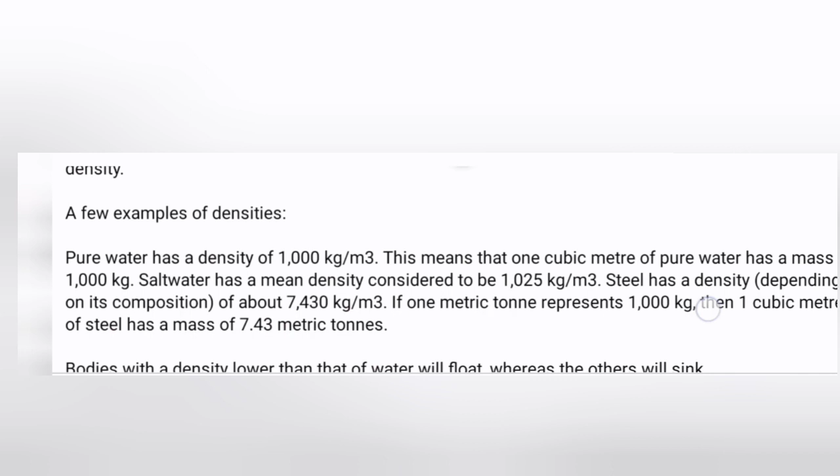A few examples of densities. Pure water has a density of 1000 kilograms per cubic meter. This means that 1 cubic meter of pure water has a mass of 1000 kg. Salt water has a mean density considered to be 1025 kg per cubic meter. Steel has a density, depending on its composition, of about 7,430 kg per cubic meter. If 1 metric ton represents 1000 kilograms, then 1 cubic meter of steel has a mass of 7.43 metric tons.

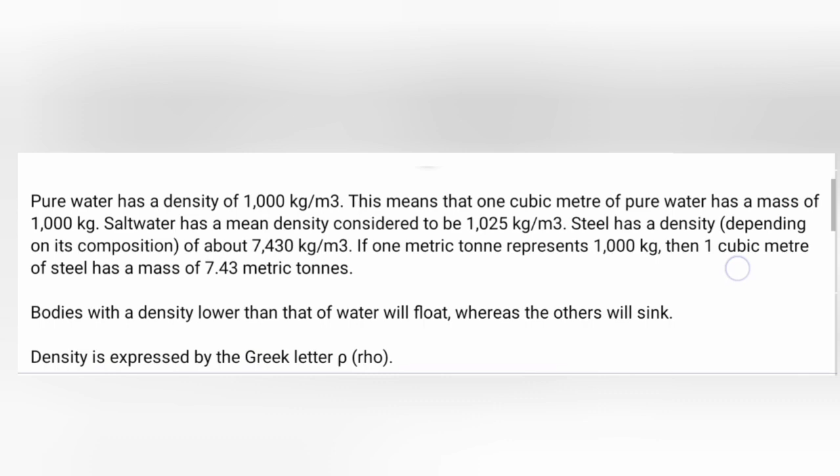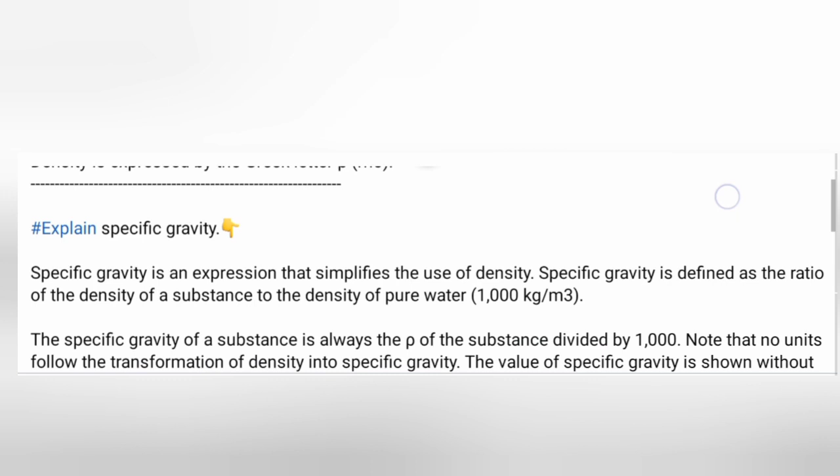Bodies with a density lower than that of water will float, whereas the others will sink. Density is expressed by the Greek letter rho. Explain specific gravity. Specific gravity is an expression that simplifies the use of density. Specific gravity is defined as the ratio of the density of a substance to the density of pure water, 1000 kilograms per cubic meter. The specific gravity of a substance is always the rho of the substance divided by 1000. Note that no units follow the transformation of density into specific gravity. The value of specific gravity is shown without units.

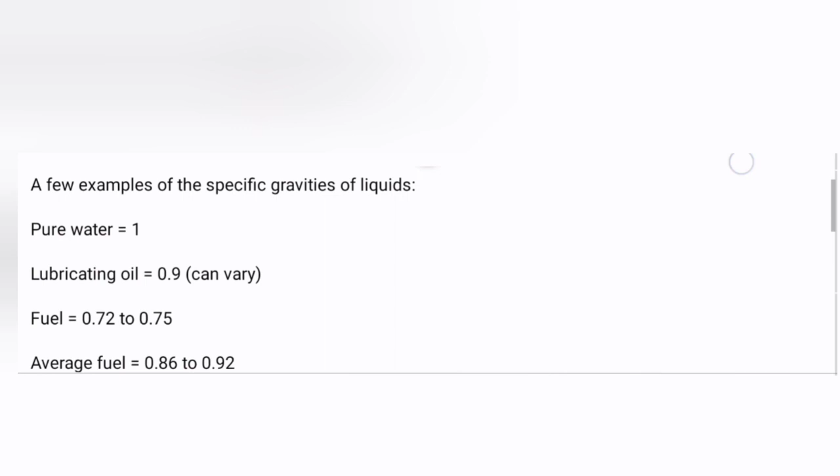A few examples of the specific gravities of liquids. Pure water equals 1, lubricating oil equals 0.9, can vary, fuel equals 0.72 to 0.75, average fuel equals 0.86 to 0.92, heavy fuel equals 0.92 to 0.95, fuel oil equals 0.95 to 0.99.

Explain the difference between mass and weight. The mass of a body or a substance is a value that represents the quantity of matter of the body or substance. The mass will not change if the body is placed on the moon, the top of a mountain, or at sea level. The force exerted by this mass when it is subject to the Earth's gravitational attraction is the weight of the body or substance. Since gravitational attraction is variable, it is lower at higher altitudes than at sea level, the moon's gravitational attraction is weaker than the Earth's, etc. The weight of a body or substance will vary according to its location, but its mass will always remain the same.

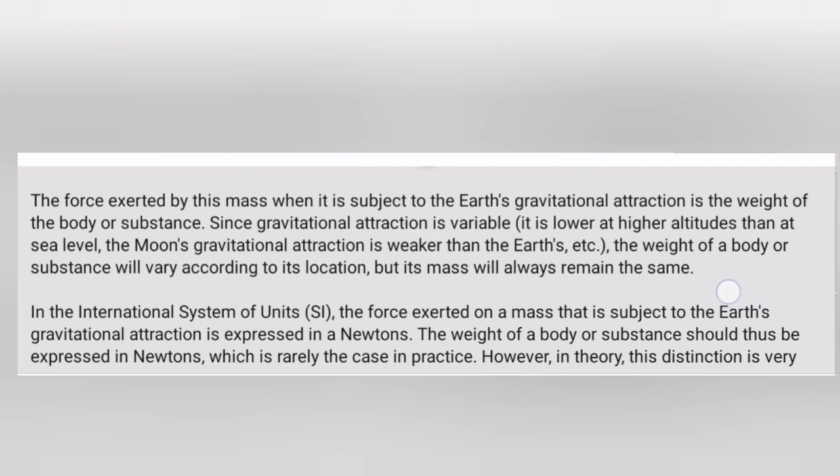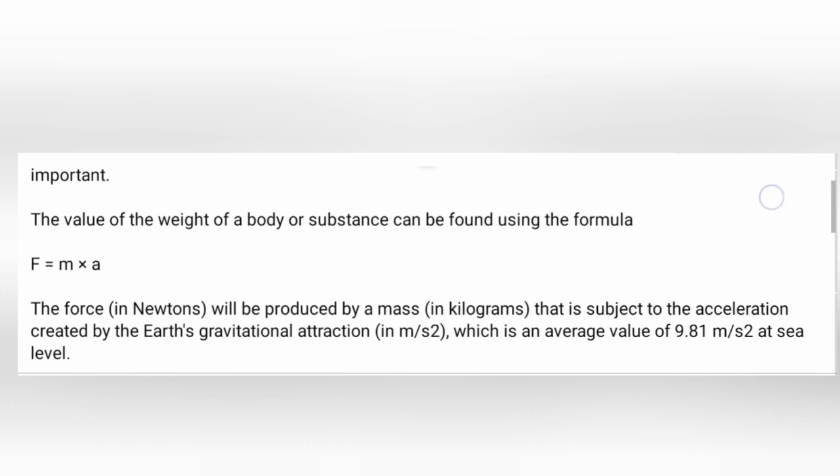In the International System of Units, SI, the force exerted on a mass that is subject to the Earth's gravitational attraction is expressed in newtons. The weight of a body or substance should thus be expressed in newtons, which is rarely the case in practice. However, in theory, this distinction is very important. The value of the weight of a body or substance can be found using the formula F equals m times a. The value of the force, in newtons, will be produced by a mass, in kilograms, that is subject to the acceleration created by the Earth's gravitational attraction, in meter per square second, which is an average value of 9.81 meters per square second at sea level.

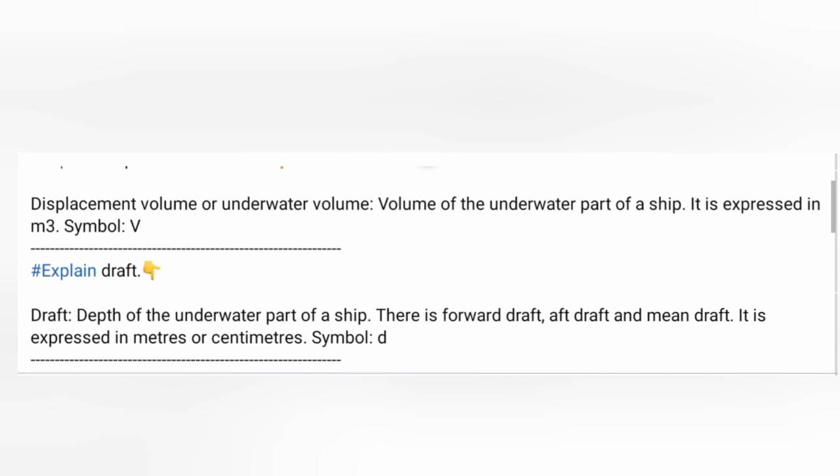Explain displacement. Displacement, mass of the volume of water that a ship displaces. This mass is equal to the ship's mass. Displacement is expressed in tons. Symbol, delta. Explain displacement volume. Displacement volume or underwater volume, volume of the underwater part of a ship. It is expressed in m3. Symbol, V. Explain draft. Draft, depth of the underwater part of a ship. There is forward draft, aft draft and mean draft. It is expressed in meters or centimeters.

Symbol, d. Explain deadweight. Deadweight, the mass that a ship can carry. This mass represents the cargo, fuel, water and everything required for proper operation of the ship. Specifically, cargo deadweight represents the mass of the cargo that can be loaded. Deadweight is the total mass of goods that a ship can carry at its maximum permissible draft, including fuel, fresh water, gear, provisions, etc.

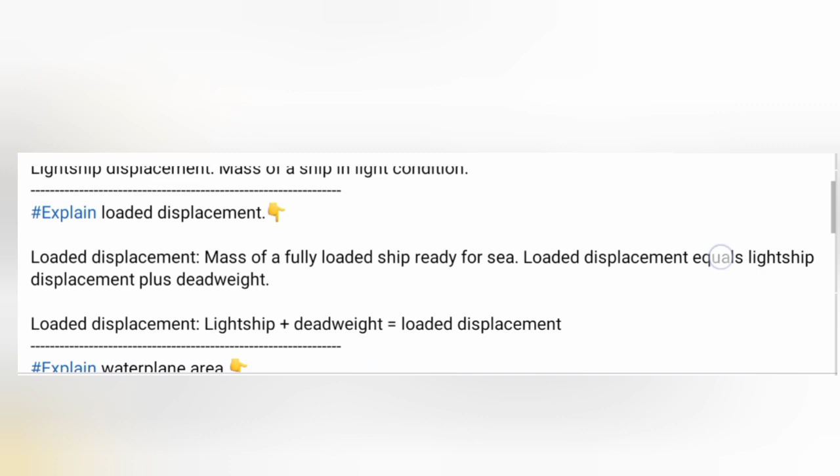Explain loaded displacement. Loaded displacement, mass of a fully loaded ship ready for sea. Loaded displacement equals lightship displacement plus deadweight. Lightship plus deadweight equals loaded displacement. Explain waterplane area. Waterplane area, area at the intersection of the surface of the water and the waterline of a ship. It can vary according to the ship's draft.

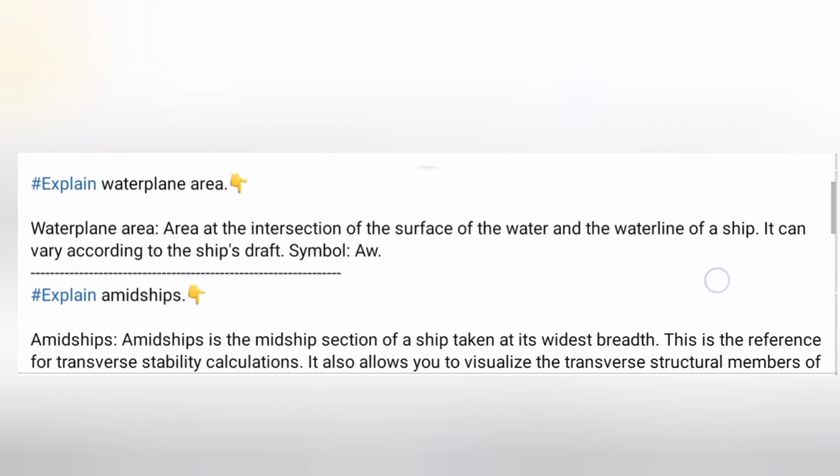Symbol, AW. Explain amidships. Amidships is the midship section of a ship taken at its widest breadth. This is the reference for transverse stability calculations. It also allows you to visualize the transverse structural members of the hull. Explain lightship weight. Lightship weight, real weight of an empty ship.

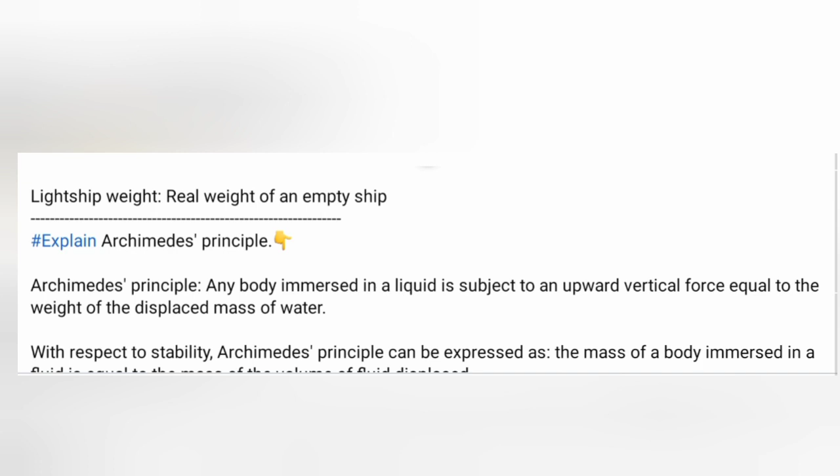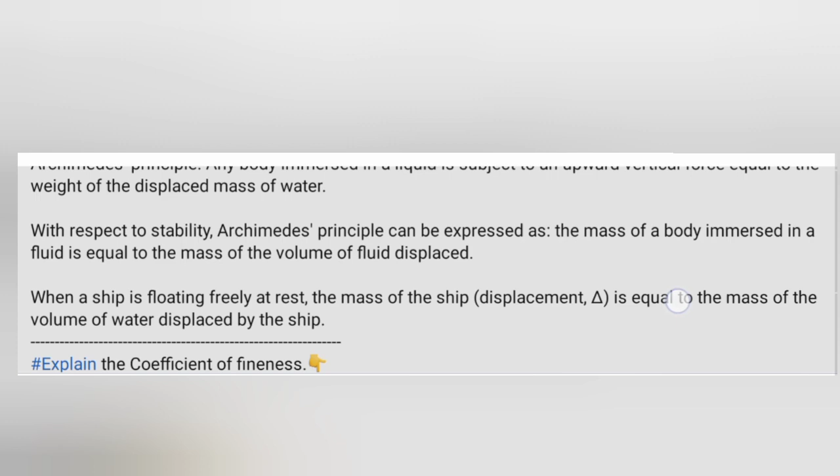Explain Archimedes' principle. Archimedes' principle, any body immersed in a liquid is subject to an upward vertical force equal to the weight of the displaced mass of water. With respect to stability, Archimedes' principle can be expressed as, the mass of a body immersed in a fluid is equal to the mass of the volume of fluid displaced.

When a ship is floating freely at rest, the mass of the ship, displacement, delta, is equal to the mass of the volume of water displaced by the ship.

Explain the coefficient of fineness. Coefficient of fineness of the waterplane area, CW. This coefficient, variable according to the ship's draft, can be expressed as the ratio of the waterplane area to the area of a rectangle having the same length and breadth.

Explain the block coefficient. Block coefficient, CB. Coefficient, variable according to the ship's draft, that represents the ratio of the underwater volume of a ship to a rectangular block having the same length, breadth and depth.

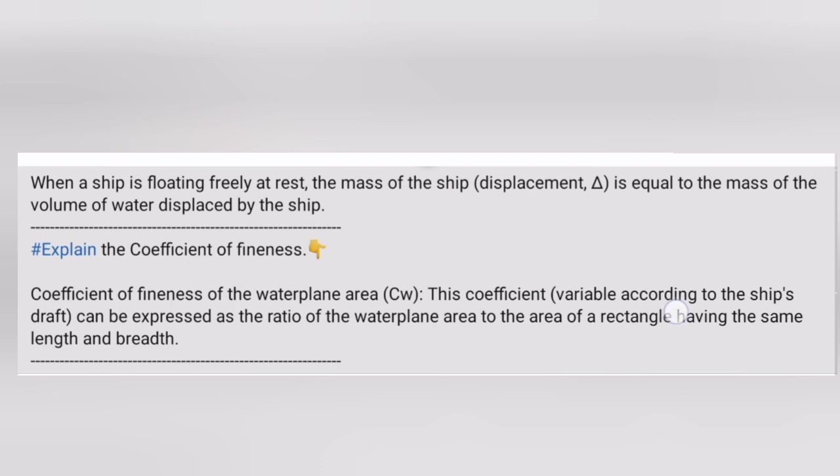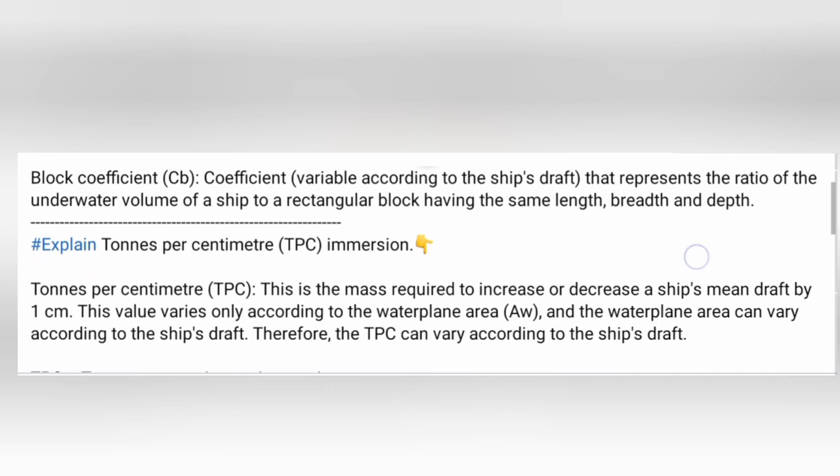Explain tons per centimeter, TPC, immersion. Tons per centimeter, TPC. This is the mass required to increase or decrease a ship's mean draft by 1 centimeter. This value varies only according to the waterplane area, AW, and the waterplane area can vary according to the ship's draft. Therefore, the TPC can vary according to the ship's draft. TPC equals tons per centimeter immersion. TPI equals tons per inch immersion.

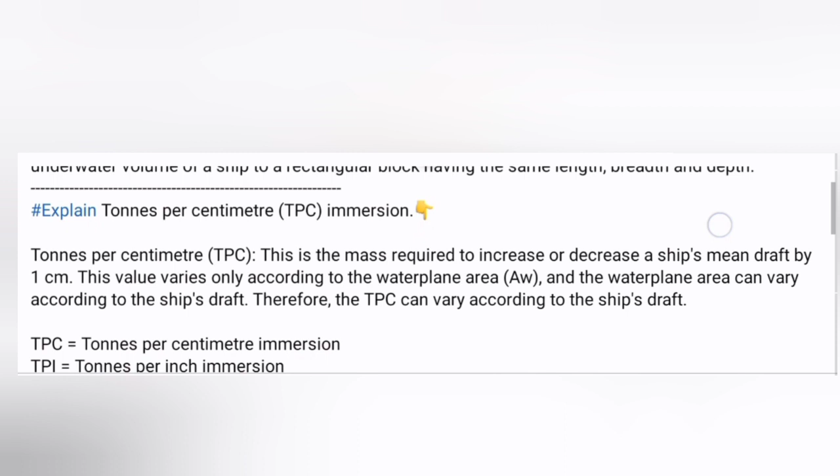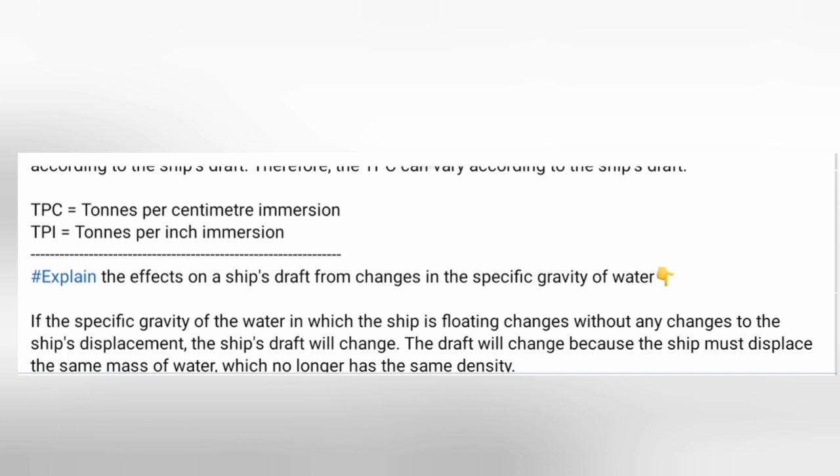Explain the effects on a ship's draft from changes in the specific gravity of water if the specific gravity of the water in which the ship is floating changes without any changes to the ship's displacement. The ship's draft will change. The draft will change because the ship must displace the same mass of water, which no longer has the same density. Delta equals V times rho. If the displacement, delta, remains constant and the density, rho, changes, the underwater volume must change. Therefore, the ship's draft will change automatically.

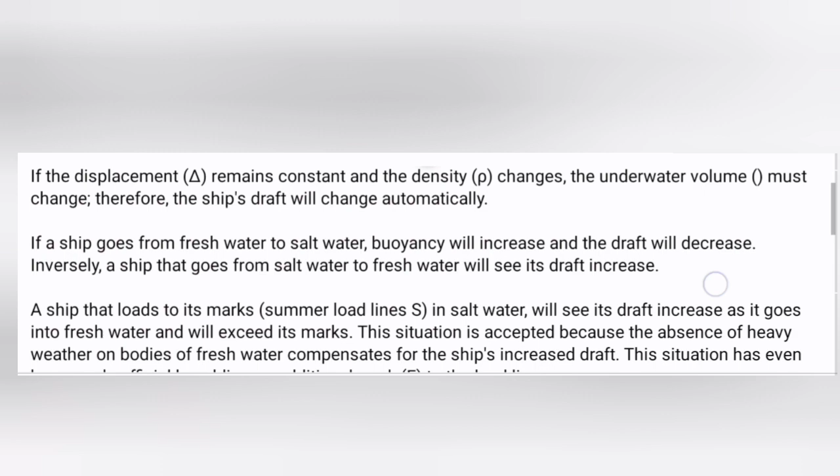If a ship goes from fresh water to salt water, buoyancy will increase and the draft will decrease. Inversely, a ship that goes from salt water to fresh water will see its draft increase. A ship that loads to its marks, summer load lines S, in salt water, will see its draft increase as it goes into fresh water and will exceed its marks. This situation is accepted because the absence of heavy weather on bodies of fresh water compensates for the ship's increased draft. This situation has even been made official by adding an additional mark, F, to the load lines.

Explain fresh water allowance, FWA. Fresh water allowance, FWA. Inversely, a ship that loads in fresh water can load up to its F line, so that when it is in salt water it will float at its regular marks. This allowed increase in draft is called the fresh water allowance. The FWA is therefore the change in draft when a ship goes from salt water to fresh water.

Explain transverse statical stability. Transverse statical stability is the ship's stability at small angles of inclination. The rules of statical stability are considered to apply to angles of inclination less than 15 degrees. To be able to calculate stability, first the fixed and mobile points on a ship's cross-section must be identified. Explain the reference point K. Reference point K is applied to the ship's lowest point, which is the keel. This is a fixed point.

Explain the center of gravity G. Transverse center of gravity G. Before applying this concept to a ship, a few short definitions of a general nature are necessary. The center of gravity of a body can be defined as the point at which the force of gravity is exerted vertically downwards, the point where a pivot can be placed that will keep the body balanced, the geometric center of a uniform body. For a ship, the center of gravity is the point at which the force generated by the ship's mass is exerted vertically downwards. The position of the center of gravity changes according to the ship's loading conditions.

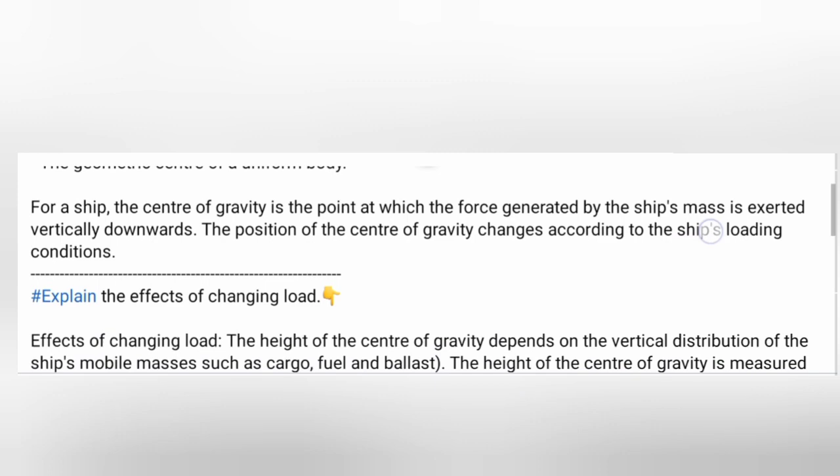Explain the effects of changing load. Effects of changing load. The height of the center of gravity depends on the vertical distribution of the ship's mobile masses such as cargo, fuel and ballast. The height of the center of gravity is measured from reference point K. The height of the center of gravity is identified as a ship's KG. For a ship to float without an angle of list, point G must be on the same vertical axis as K. As soon as G leaves this vertical axis, an angle of list is produced and the ship will no longer float upright. The center of gravity can thus be shifted vertically and horizontally by transferring, adding or removing mobile masses.

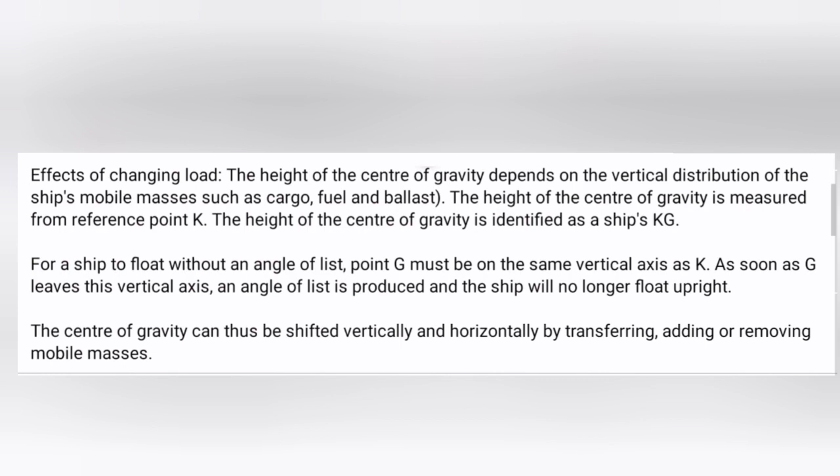If mass is added to a ship, the center of gravity shifts towards the position of the added mass. For example, fuel added to a ship's double-bottom tanks will lower the center of gravity. Deck cargo generally raises a ship's G. A concentration of cargo on a ship's port side will shift G to port, which will cause the ship to list to port. The inverse is true when mobile masses are removed.

For example, fuel consumption reduces the mass in the storage tanks, and if they are double-bottom tanks, the loss of mass shifts G upwards. If deck cargo is unloaded, G is shifted downwards. Unloading cargo on the starboard side will shift G to port, which will result in a list to port. If a mass already on board is moved, the position of the ship's center of gravity will shift in the same direction as the mass. For example, shifting port ballast to starboard will shift G to starboard, which will tend to cause a list to starboard.

Explain the center of buoyancy B. Transverse center of buoyancy B. A ship's center of buoyancy can be defined as the point through which the force of buoyancy acts vertically upwards. You can also say that the center of buoyancy is the geometric center of the ship's underwater volume. The height of the center of buoyancy is measured from reference point K and is thus KB.

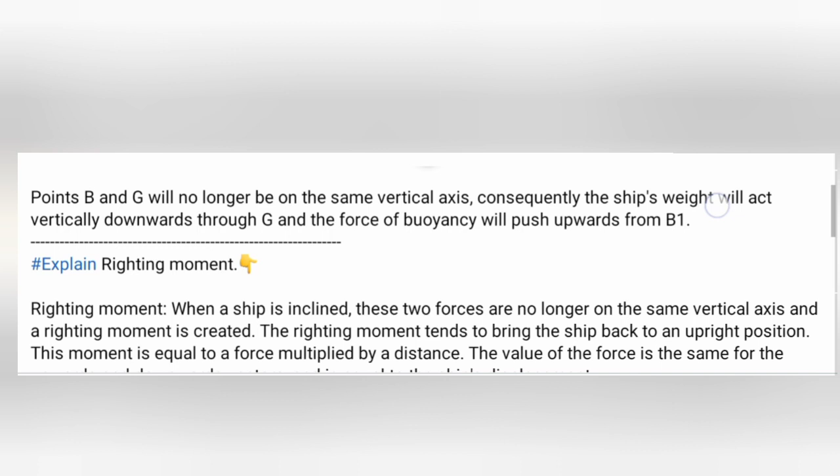If a ship is floating upright, points K, G and B will all be on the same vertical axis. If the ship is inclined by external forces, wind, waves, tight mooring at the wharf, G should not change position, no mass has shifted. But B will shift to the geometric center of the new underwater volume. Points B and G will no longer be on the same vertical axis. Consequently, the ship's weight will act vertically downwards through G and the force of buoyancy will push upwards from B1.

Explain righting moment. Righting moment: when a ship is inclined, these two forces are no longer on the same vertical axis and a righting moment is created. The righting moment tends to bring the ship back to an upright position. This moment is equal to a force multiplied by a distance. The value of the force is the same for the upwards and downwards vectors and is equal to the ship's displacement.

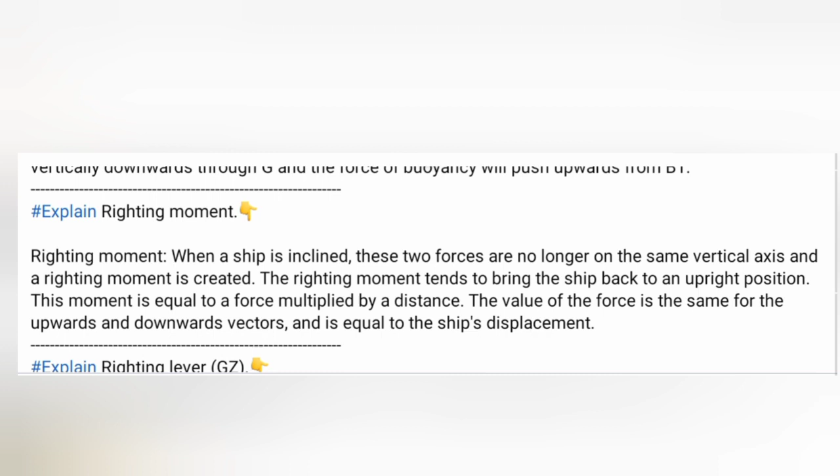Explain righting lever, GZ. Righting lever, GZ. The distance between the two vectors is called GZ and represents the righting lever. The larger the righting lever, the higher the righting moment. The size of the righting lever increases with the ship's inclination. In other words, up to a certain angle of inclination, usually between 40 degrees and 60 degrees, the more the ship lists, the greater its tendency to return to an upright position. If the maximum righting angle is exceeded, the righting lever decreases and the ship's ability to right itself also decreases until it reaches an angle where the righting lever is zero and the ship is in serious danger of capsizing.

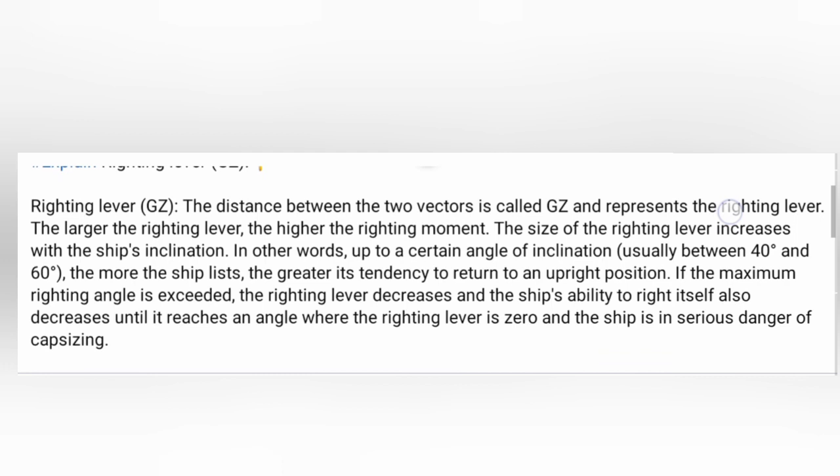Inversely, if G is located high on the center line, the righting lever will be smaller so the righting moment will be weaker. The ship will right itself more slowly. The value of the righting moment, also called the moment of statical stability, MSS, is calculated by the formula MSS = Δ × GZ. To find the value of GZ at small angles of inclination, the following trigonometric equation is used: GZ = GM sin θ, theta being the ship's angle of inclination.

Explain a righting moment with a reduced GM. The position of G in relation to M is crucial in a ship's ability to right itself. Under normal conditions, G should always be below M. The GM is then said to be positive. The greater the distance between these 2 points, the higher the positive GM. As stated in the previous paragraph, the larger the GM, the larger the righting lever. If G approaches M, the righting lever decreases and the righting moment is weak.

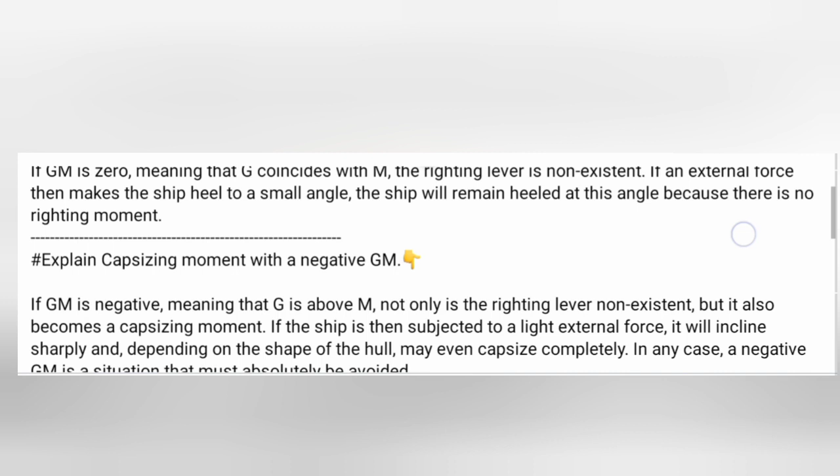Explain capsizing moment with a negative GM. If GM is negative, meaning that G is above M, not only is the righting lever non-existent but it also becomes a capsizing moment. If the ship is then subjected to a light external force, it will incline sharply and, depending on the shape of the hull, may even capsize completely. In any case, a negative GM is a situation that must absolutely be avoided.

What can cause an abrupt shifting of G? Abrupt shifting of G. Two situations have a radical effect on the position of G. In both situations, an abrupt rise in G occurs, which in some extreme cases can lead to a situation where GM becomes negative. Both situations are a result of the free surface effect and the effect of suspended weight.

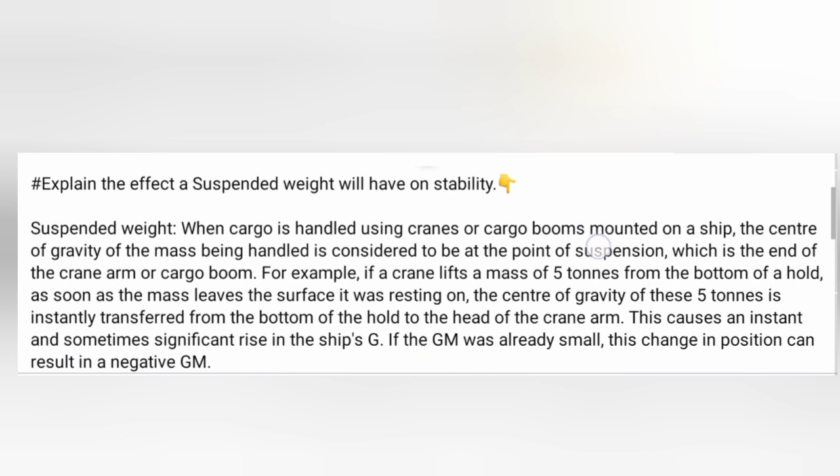Explain the effect a suspended weight will have on stability. Suspended weight. When cargo is handled using cranes or cargo booms mounted on a ship, the center of gravity of the mass being handled is considered to be at the point of suspension, which is the end of the crane arm or cargo boom. For example, if a crane lifts a mass of 5 tons from the bottom of a hold, as soon as the mass leaves the surface it was resting on,

the center of gravity of these 5 tons is instantly transferred from the bottom of the hold to the head of the crane arm. This causes an instant and sometimes significant rise in the ship's G. If the GM was already small, this change in position can result in a negative GM.

Explain free surface effect. Free surface effect. The other situation is the occurrence of the free surface effect. If a ship's tank is partially filled and the ship rolls, the mass of liquid in the tank moves uncontrollably. The center of gravity of the liquid mass shifts from side to side, and the change in shape of the liquid can also cause the G of the moving mass to rise radically.

In addition, the inertia of the liquid mass moving around affects the ship's transverse stability and the position of its G. The effect of the inertia of the moving liquid is applied by making a virtual change to the position of G. This change in the height of G of the liquid mass can have a radical effect on the ship's height of G, which can result in a negative GM. To reduce the free surface effect, anti-rolling devices are placed in the tanks.

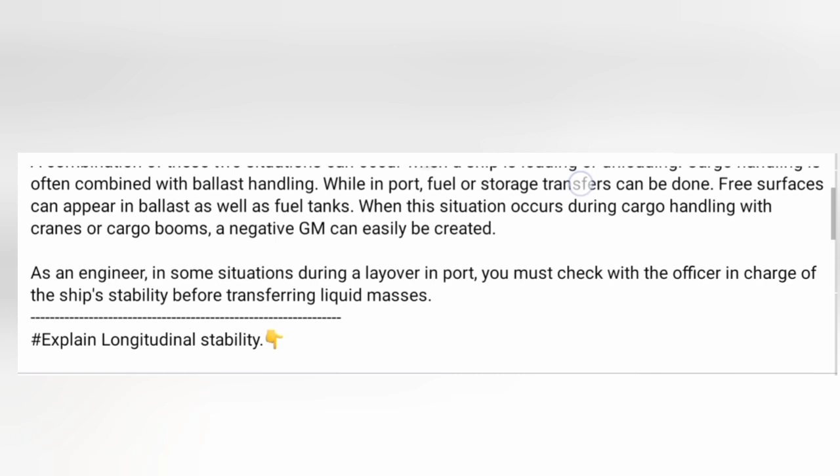A combination of these two situations can occur when a ship is loading or unloading. Cargo handling is often combined with ballast handling. While in port, fuel or storage transfers can be done. Free surfaces can appear in ballast as well as fuel tanks. When this situation occurs during cargo handling with cranes or cargo booms, a negative GM can easily be created. As an engineer, in some situations during a layover in port, you must check with the officer in charge of the ship's stability before transferring liquid masses.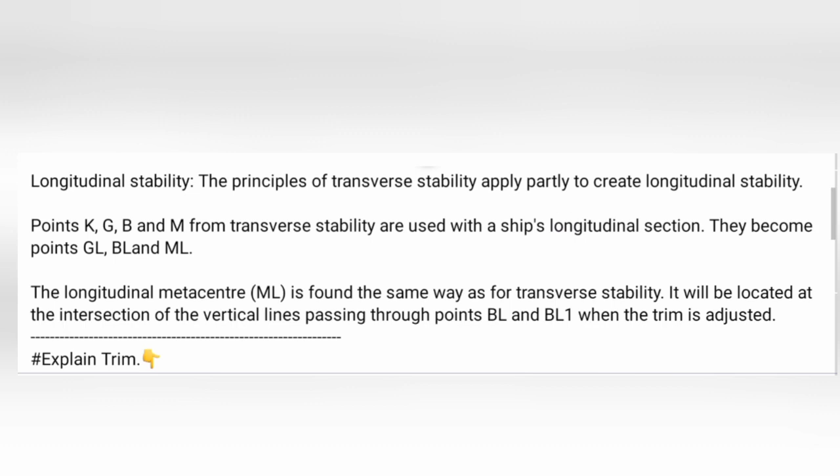Explain longitudinal stability. Longitudinal stability. The principles of transverse stability apply partly to create longitudinal stability. Points K, G, B and M from transverse stability are used with a ship's longitudinal section. They become points GL, BL and ML. The longitudinal metacenter, ML, is found the same way as for transverse stability. It will be located at the intersection of the vertical lines passing through points BL and BL1 when the trim is adjusted.

Explain trim. In longitudinal stability, trim can be considered as the equivalent of list in transverse stability. Trim represents the longitudinal inclination of the ship, and instead of being expressed in degrees, it is given as a difference between the forward and aft drafts. When aft draft is greater than forward draft, the usual situation, the trim is positive. When forward draft is greater, the trim is negative.

For example, a ship with a forward draft of 5 meters and an aft draft of 5.75 meters will have a positive trim of 75 centimeters. Shifting, loading and unloading of a mass will affect a ship's trim. The change in trim when handling masses is measured using the concept of MCTC and MCTI. Explain MCTC and MCTI. MCTC is the moment to change trim 1 centimeter. MCTI is the moment to change trim 1 inch.